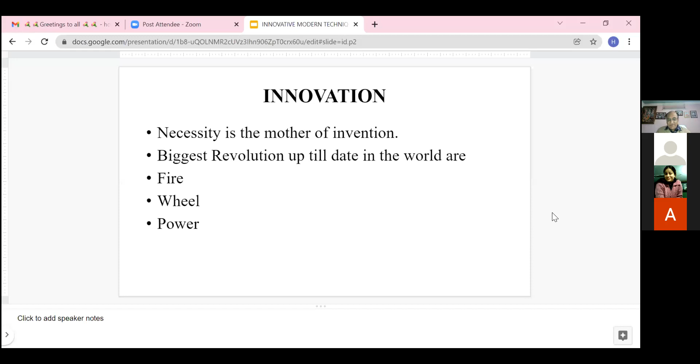Innovation - nothing is permanent in the world, neither products nor technology. Invention refers to the creation of a brand new product or device. Innovation is an act of making change to the existing product or process by introducing new ways or ideas - an act or process or methodology of introducing new ideas, devices, or methods of technology to get better results in terms of quality, size, durability, cost, and time.

The objective of innovations is based on cost saving, time saving, being aesthetically acceptable, and environmental friendly. So the first topic that I have taken is self-healing concrete. Why is self-healing concrete necessary? Because this is one of the major problems of concrete - concrete will crack, whether it is visible or not. But without cracking, reinforcement will not come into action.

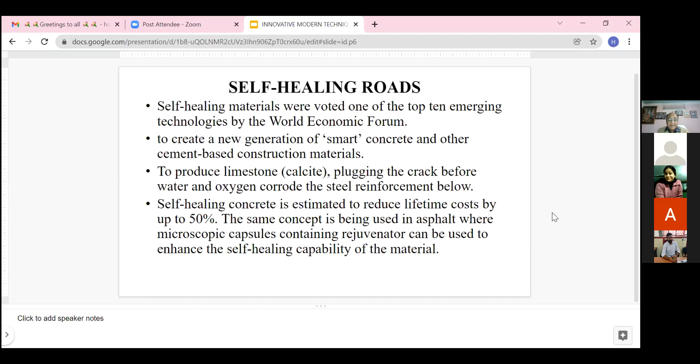Self-healing materials were voted one of the top 10 emerging technologies by the World Economic Forum, to create a new generation of smart concrete or other cement-based construction materials to produce limestone calcite, plugging the cracks before water and oxygen corrode the steel reinforcement below. Self-healing concrete is estimated to reduce lifetime cost by up to 50%. The same concept is being used in asphalt, where microscopic capsules containing rejuvenator can be used to enhance the self-healing capability of a material.

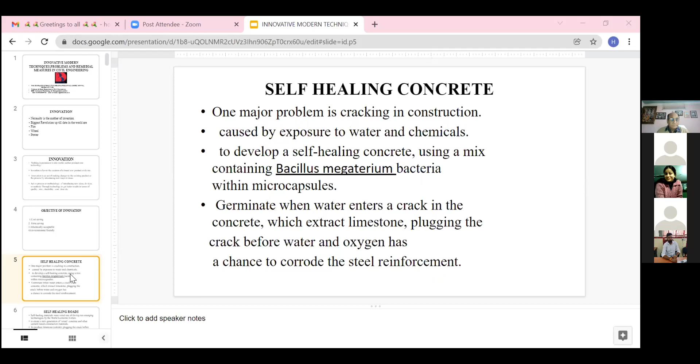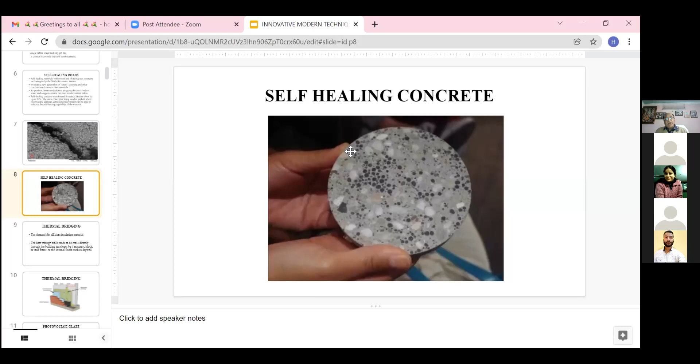The next is thermal bridging, driven by the demand for efficient insulation material. The heat through a wall tends to pass directly through the building envelope, be it masonry, block, or frame, to internal fascia such as dry wall.

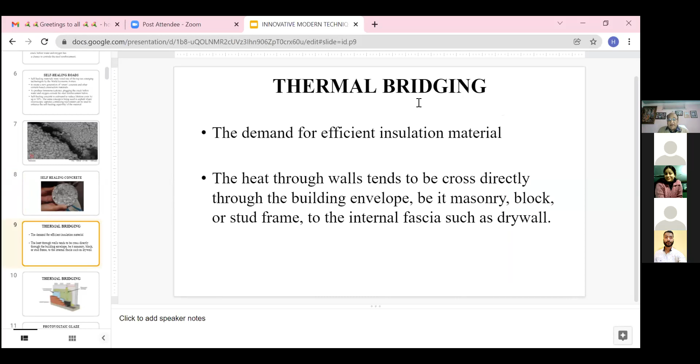We can see here, this is the thermal bridging. This is the insulation layer, a continuous insulation layer. These are the points through which bridging could occur, and this is the wall system. So the transfer of heat from one phase to another is restricted by this thermal bridging.

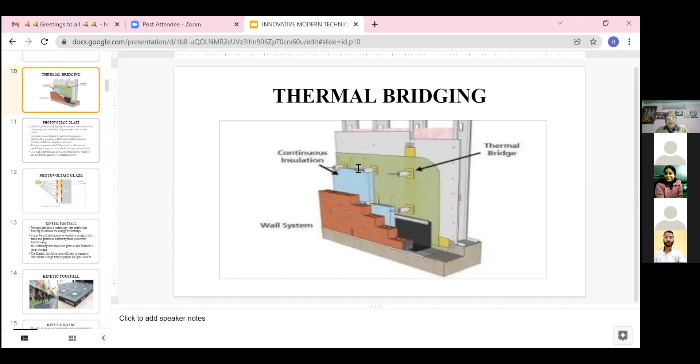Now come to the photovoltaic glaze. This can help buildings generate their own electricity by turning the whole building envelope into a solar panel.

Polysolar is a company that provides transparent photovoltaic glass as a structural building material, forming windows, facades, and roofs. The glazing material of Polysolar is efficient at producing energy even on north-facing or vertical walls. It has high performance at raised temperature, meaning it can be double glazed or insulated directly.

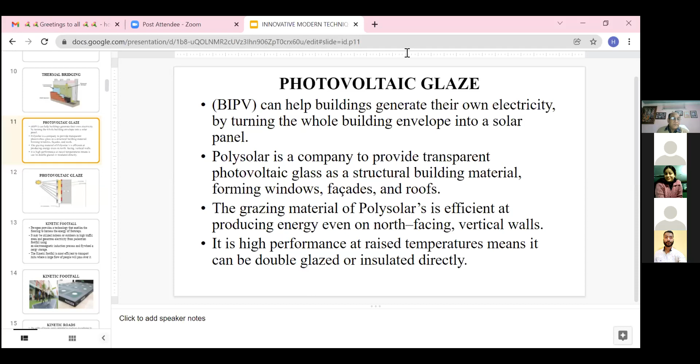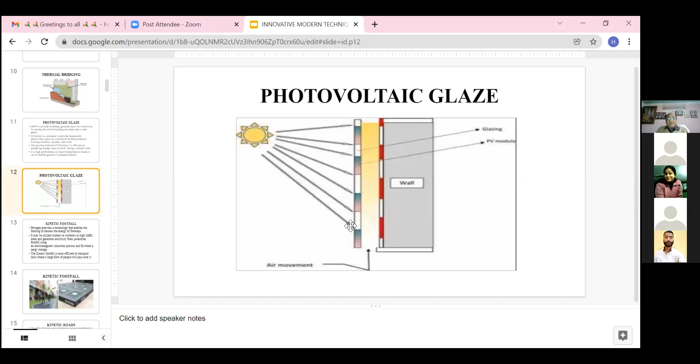We can see here, this is the photovoltaic glaze. This is the glazing layer. The sun rays come directly to this glazing, and this is the PV module, and this is made for air movement. So the solar energy is directly converted into electrical energy.

Then the next innovation is kinetic footfall. Pavegen provides a technology that enables the flooring to harness the energy of footsteps. It may be utilized indoors or outdoors in high traffic areas and generates electricity from pedestrian footfall using an electromagnetic induction process and flywheel energy storage. The kinetic footfall is most efficient in transport hubs where a large flow of people will pass over it.

We can see in this diagram, this is the company Pavegen, and this is the road through which passengers or pedestrians are going. So the kinetic energy of the passenger or pedestrian will directly convert into electricity.

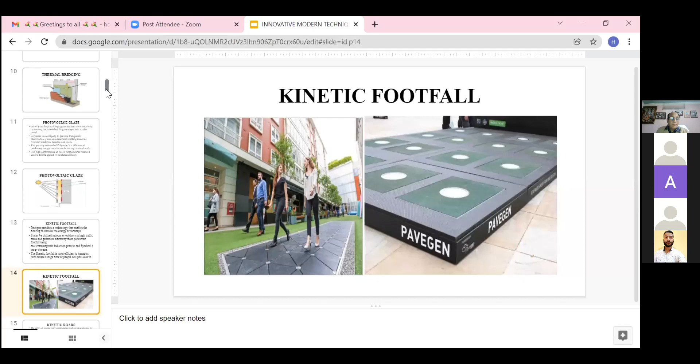The next is kinetic roads. The utility of kinetic energy potential in roadways is being explored by Italian startup Underground Power. The company has developed a technology called Lybra, a tire-like rubber paving that converts the kinetic energy produced by moving vehicles into electrical energy.

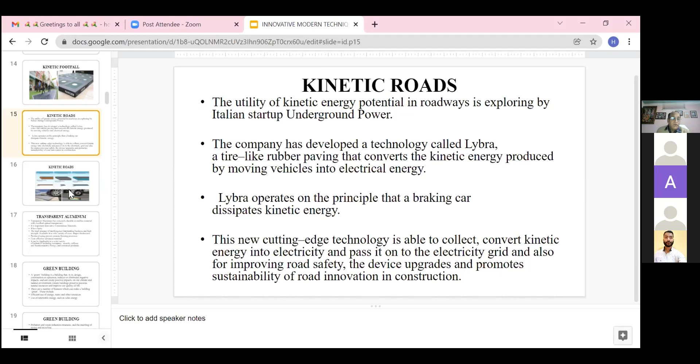Lybra operates on the principle that a braking car dissipates kinetic energy. This cutting-edge technology is able to convert kinetic energy into electrical energy and pass it on to the electricity grid, and also improves road safety. The device upgrades and promotes sustainability of road innovation in construction. So we can see here, this is the kinetic roads.

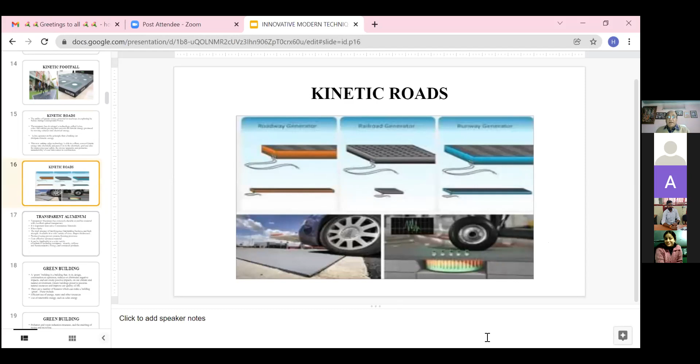Then the next innovation is transparent aluminum. Aluminum is very good looking and pleasant, but one of its major defects is that it is not transparent. So now the innovation is transparent aluminum.

Transparent aluminum has extremely durable crystalline material with excellent optical transparency. It is an important innovative construction material. It has clarity, total absence of birefringence, outstanding hardness, and high strength, available in a wide variety of shapes, sizes, and thicknesses.

Produced using proven ceramic forming processes, it is cost effective, an advanced material. It can be applicable to a wide variety of industries, including aerospace, security, defense, semiconductor, energy, and consumer products. Transparent aluminum is not very popular now, but in future it is going to be a milestone in the field of construction.

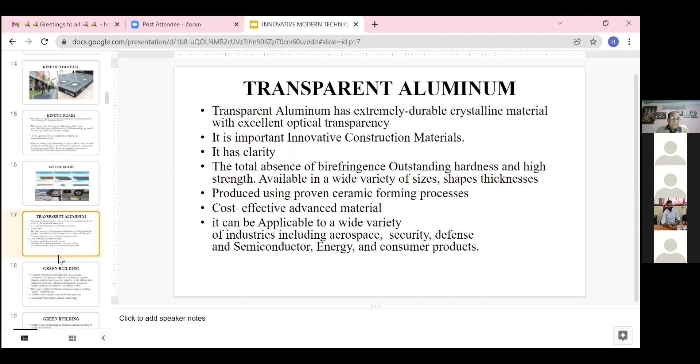Now come to the green building. A green building is a building that, in its design, construction, and operation, reduces or eliminates negative impacts and can create a positive impact on our climate and natural environment. Green building preserves precious natural resources and improves our quality of life.

There are a number of features that can make a building green. This includes efficient use of energy, water, and other resources. Next is use of renewable energy, such as solar energy.

Pollution and waste reduction measures, and the enabling of reuse and recycling. Good indoor environmental air qualities. Use of materials that are non-toxic, ethical, and sustainable. Consideration of environment in design, construction, and operation. Consideration of the quality of life of occupants in design, construction, and operation. A design that enables adaptation to a changing environment.

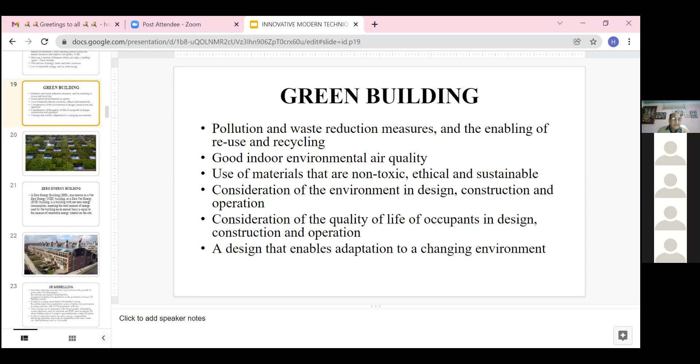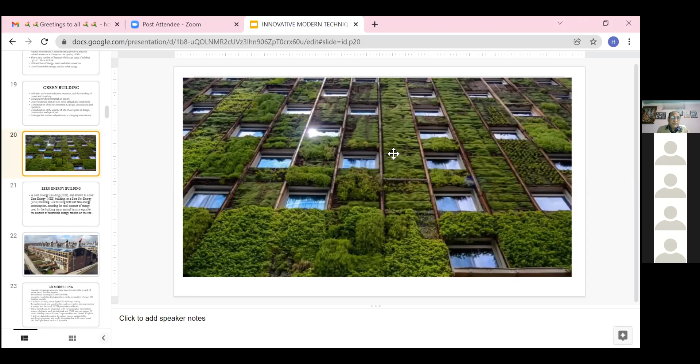Next is zero energy building. It is like a green building, but it has a certain advantage. A zero energy building, also known as a net zero energy building or zero net energy building, is a building with net zero energy consumption, meaning the total amount of energy used by the building on an annual basis is equal to the amount of renewable energy created on the site.

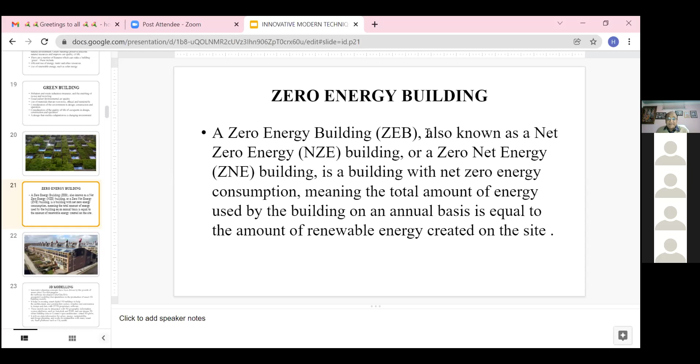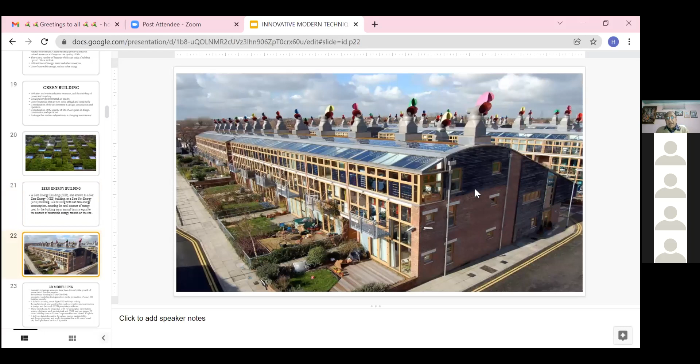Now, though civil engineering is not very much related to computer or IT, nowadays it is very difficult to fix a boundary between the departments of civil engineering, electrical engineering, mechanical engineering, or computer engineering, because all these departments are correlated with each other. So without using computer or artificial intelligence or machine learning, it is very difficult to work in civil engineering also.

So the next is 3D modeling. This is the innovative planning concept that has been driven by the growth of the smart city.

For that purpose, the software developed Cyber City 3D is geospatial modeling that specializes in the production of a smart 3D building model. It helps in creating a smart digital 3D building to help the architectural and construction sector visualize and communicate design and data with CC3D proprietary software. These models can be integrated with 3D geographic information system platforms such as Autodesk or ESRI, and can stream 3D urban building data to Cesium's open architecture virtual 3D globe.

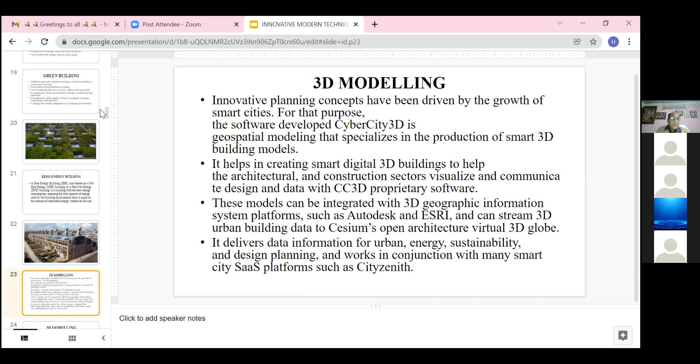Then modular construction. This is a very fast growing innovation. Building construction off-site using the same material and design of the same standard as conventional on-site construction, limiting environmental disruption, delivering components as and when needed, and turning construction into a logistics exercise. A strong sustainability benefit from fewer vehicle movements to less waste.

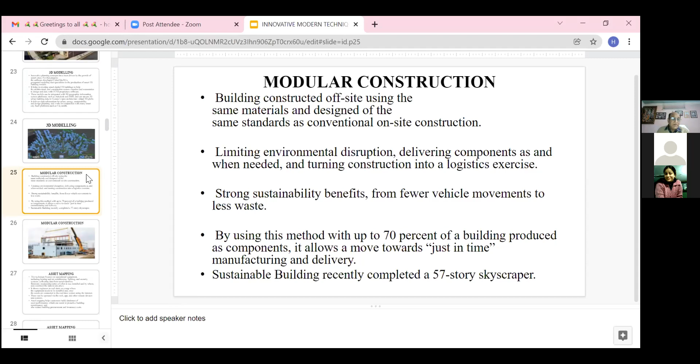By using this method, up to 70% of a building is produced as components, allowing a move towards just-in-time manufacturing and delivery. Sustainable buildings recently completed include a 57-story skyscraper. So the main purpose of this innovation is to manufacture more than 70% of the elements of a building or structure in the factory with complete quality control, and then it is erected at the site. So the quality of this construction is very good as compared to in-situ construction.

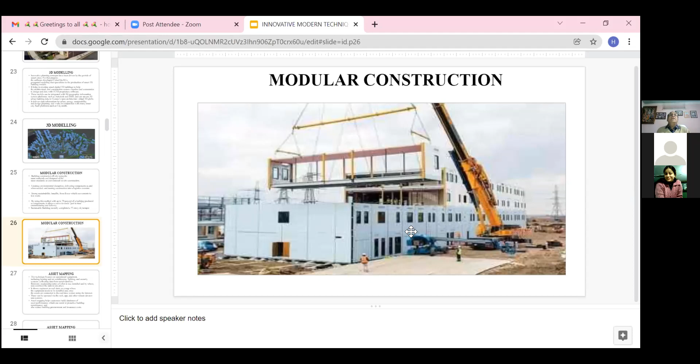So next is asset mapping. This technique focuses on operational equipment, including heating and air conditioning, lighting, and security systems, collecting data from serial numbers, firmware, engineering notes of when it was installed and by whom, and combining the data in one place. The main purpose of this asset mapping is that all the data of the society is kept at a place where it can be used.

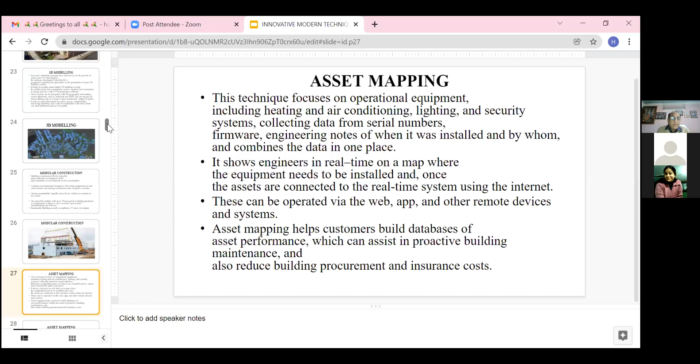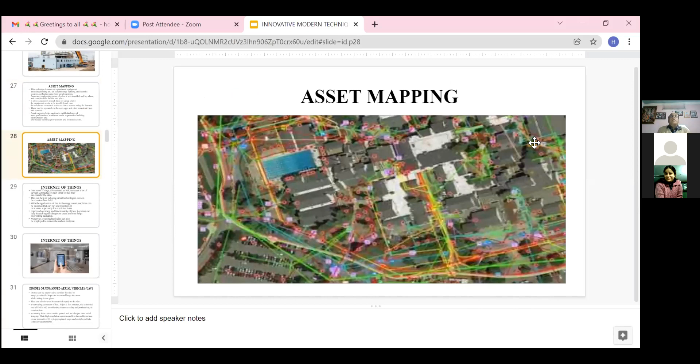Next is Internet of Things, popularly known as IoT, indicating a lot of devices connected to each other so that they can transfer data. This can help in inducing smart technologies even in the construction field. With the application of this technology, smart machines can be invented that can run and maintain themselves, especially for repetitive tasks. Improved accuracy and functionality of geolocation can help in tracking dangerous areas and thus help in avoiding accidents.

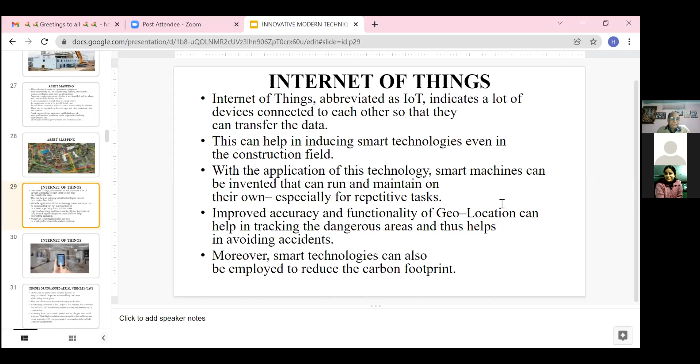Now, the next innovation is a drone, an unmanned aerial vehicle. This is very much used today for various purposes of civil engineering construction. Drones can be employed to monitor the site. Its use permits the inspector to control a large site area while sitting in one place. They can also be used for material supply to the site and surveying vast areas of land in just a few minutes. The continued rise of UAVs will considerably improve safety and productivity in construction.

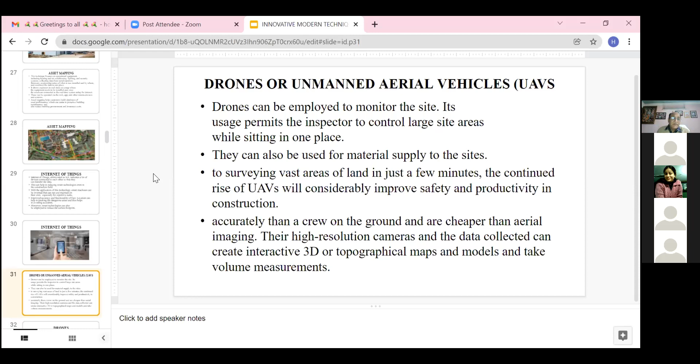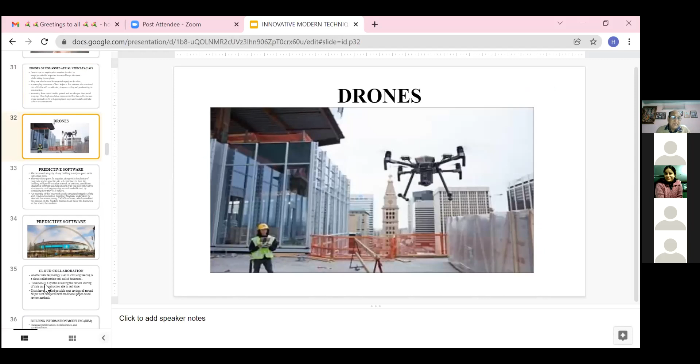The next is cloud collaboration, because it is very much related with computer. Without cloud collaboration, it is very difficult nowadays for the construction industries.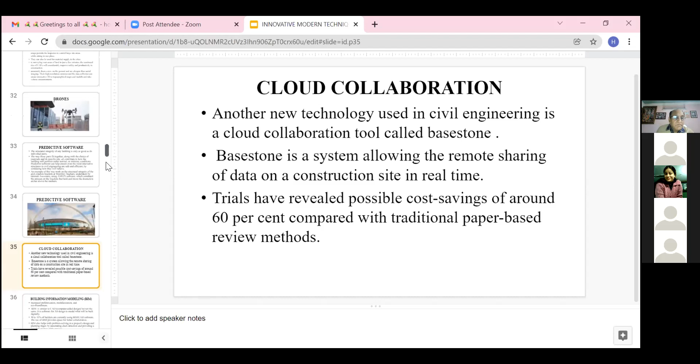Now another important innovation is building information modeling, BIM. It is an increased prefabrication, modularization, and eco-friendliness. BIM is similar to CAD, but it is not a CAD.

It is a software for 3D design to model what will be built digitally. 30 to 35% of the builders are currently using BIM or CAD software. The use of BIM provides a space for better collaboration. BIM also helps with problem solving in the project design and planning stages by automating clash detection and providing a complete picture of a project.

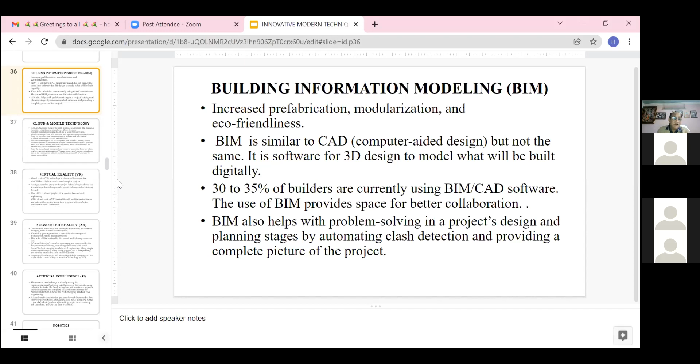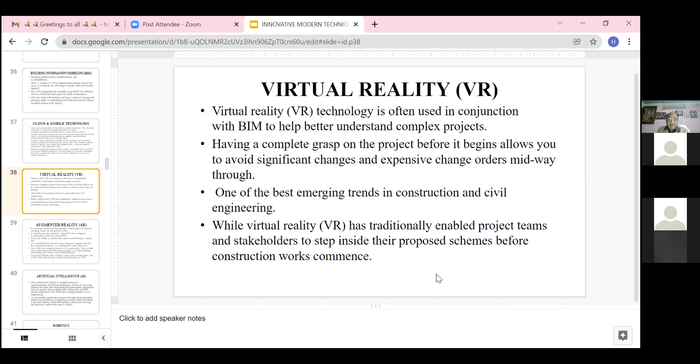Now, virtual reality, VR. Virtual reality technology is often used in conjunction with BIM to help better understand complex projects. Having a complete grasp on the project before it begins allows you to avoid significant changes and expensive change orders midway through. One of the best emerging trends in construction and civil engineering. Virtual reality has traditionally enabled project teams and stakeholders to step inside their proposed scheme before construction work commences.

Now, augmented reality, AR. This is somehow related with virtual reality, but it is slightly advanced than virtual reality. Construction World says that although virtual reality has been an emerging trend over the past few years, it is quickly growing outdated, especially when compared to augmented reality use and benefits. This is the ability to visualize the natural world through a camera lens. So this is the advanced version, you can say, of virtual reality.

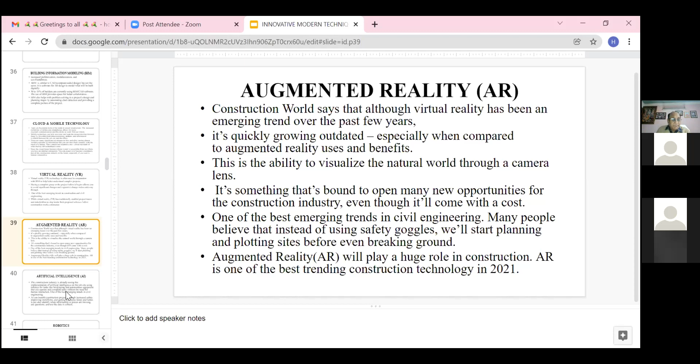Then comes artificial intelligence. Nowadays, the whole world is based on artificial intelligence. Our institute has also opened a department of artificial intelligence, as everyone knows. So without artificial intelligence, it is very difficult now to make up or keep up with others.

The construction industry is already seeing the implementation of artificial intelligence on the job site using robotics for tasks like bricklaying, autonomous equipment that can operate and complete tasks without need for human interaction. One of the best emerging trends in civil engineering. Artificial intelligence can benefit construction projects through increased safety, improving workflow, and getting the job done faster and better. It can also identify when information or pieces are missing.

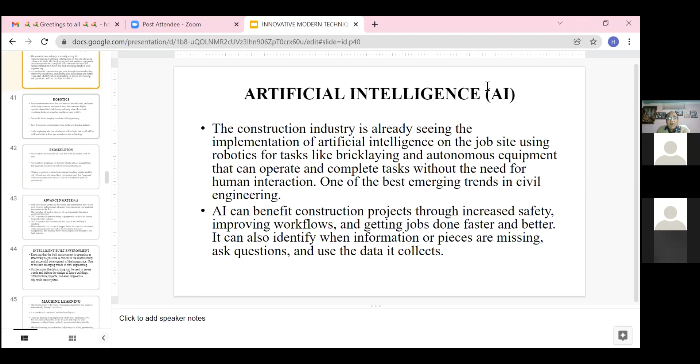Then, exoskeleton. Exoskeletons are wearable devices, meaning they can be worn and work in tandem with the user. The exoskeleton is placed on the user's body and acts as an amplifier that augments, reinforces, or restores human performance, helping to protect workers from manual handling injuries and the risk of hand-arm vibration. These mechanical suits augmenting the human operative can also deliver considerable gain in productivity.

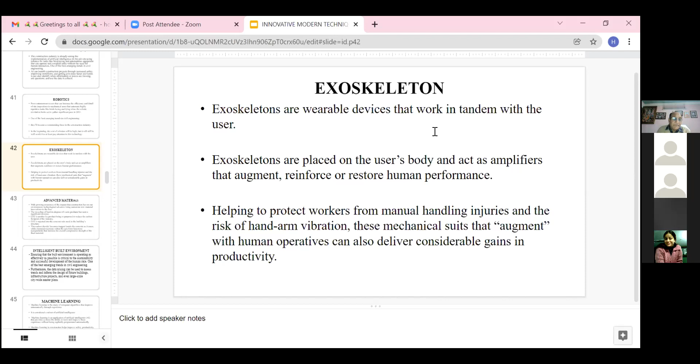Then advanced materials. There are many materials nowadays used to improve the quality, size, shape, etc. With the growing awareness of the impact that construction has on our environment, and technological advances being numerous, new materials innovation comes to the fore. Recycling hard-to-dispose-of waste products has seen a significant increase. CO2 is another byproduct being repurposed to reduce the carbon footprint of the industries.

This is a very innovative thing being done nowadays. CO2 is harmful and contributes to pollution in the environment, but it can be injected into the concrete so that it cures while a chemical reaction within the mix form limestone nanoparticles increases the overall compressive strength of the final material. So carbon dioxide may be used to increase the compressive strength of the concrete.

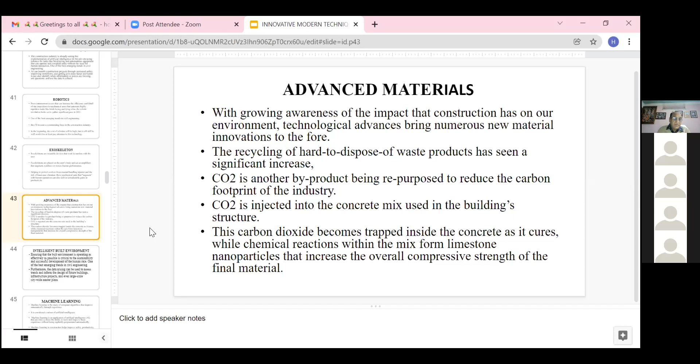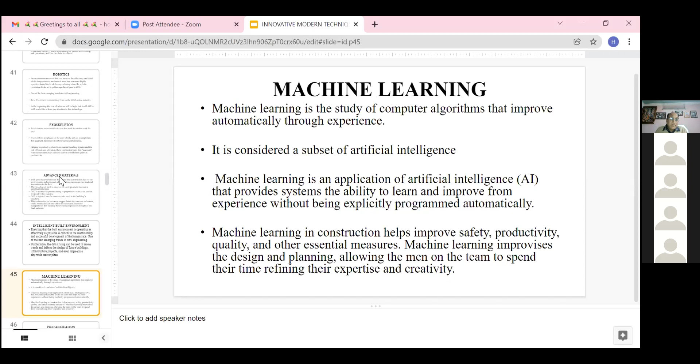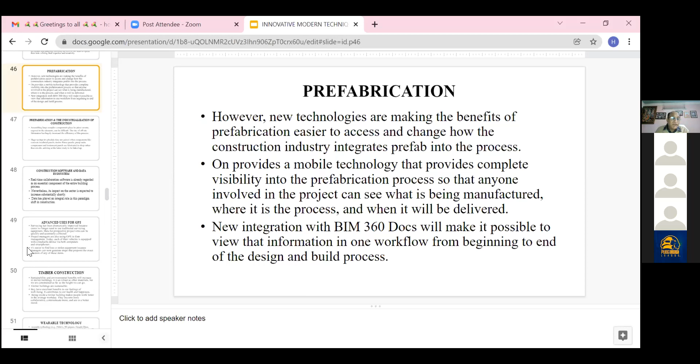Prefabrication and industrialization of construction. Assembling large complex components piece by piece on site, exposed to the elements, can be difficult. The rise of off-site fabrication has hugely increased the efficiency of this process.

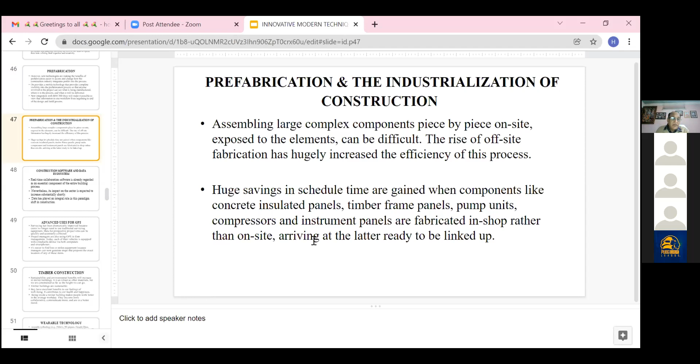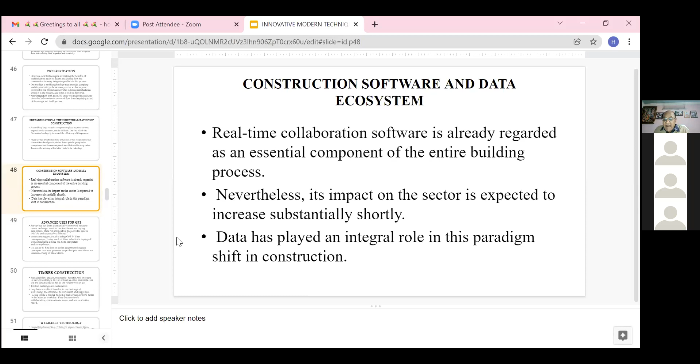Now, construction software and data ecosystem. As I have told, without computer, without artificial intelligence, without other branches of computer, it is very difficult for any department to work and compete with others. Real-time collaboration software is already regarded as an essential component of the entire building process. Nevertheless, its impact on the sector is expected to increase substantially in the near future. Data has played an integral role in the paradigm shift in construction.

The advanced uses for GPS. As you know, global positioning system is now used worldwide, and in the construction industry it is widely used nowadays. Surveying has been dramatically improved because a crew no longer needs to use traditional surveying equipment. Data for a prospective project site can be quickly and accurately collected. Project managers are also using GPS in fleet management. Today each of their vehicles is equipped with a trackable device via both computer and smartphone. It is easier to find lost and stolen equipment because managers can now generate maps that pinpoint the exact location of any of these items.

Now, timber construction. Sustainability and environmental benefits will increase timber building. It is as robust as other materials, but we are constrained as far as the height we can go. Timber buildings are sustainable and have excellent benefits to our feeling of well-being. This is orthodox; it contributes to our health and happiness, a symbol of health and happiness. Being inside a timber building makes people work better in the average workday. They become more collaborative, communicate more, and are in a better mood.

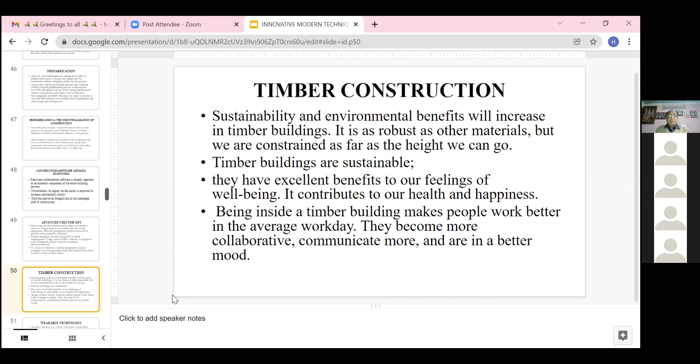Wearable technology, such as Fitbits, 3D glasses, Google Glass, and armbands that can communicate with coaches on the sidelines, will become an emerging trend useful in keeping workers safe. This will help keep workers from constantly looking down at their instructions, because now they can talk to one another via this technology. Additionally, it can help track where workers are if there is an accident. This is bound to become mandatory at some point in the future.

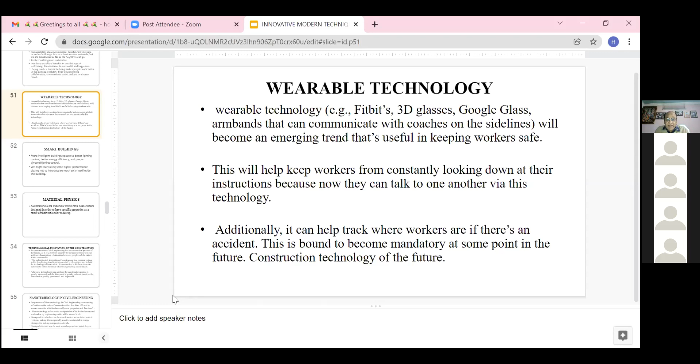Construction technology of the future: a smart building. First of all, this term 'smart' is not just a word. SMART means S for specific, M for measurable, A for affordable, R for realistic, T for timely building. This SMART concept is widely used in a program of the Government of India, the Smart City program. More intelligent buildings equate to better lighting control, better energy efficiency, and proper air conditioning control. We might start using high performance glazing to avoid introducing so much solar load inside the building.

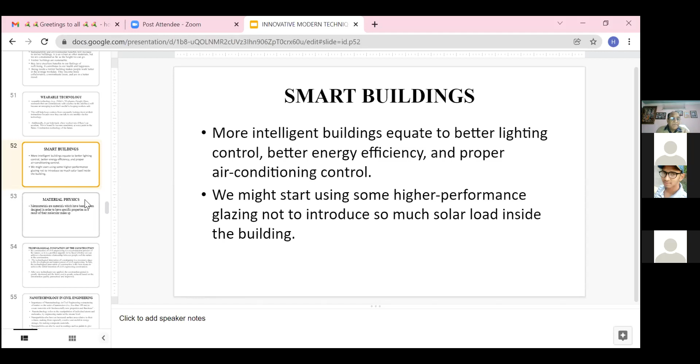Material physics: metamaterials are materials which have been custom designed to have a specific property as a result of their molecular makeup.

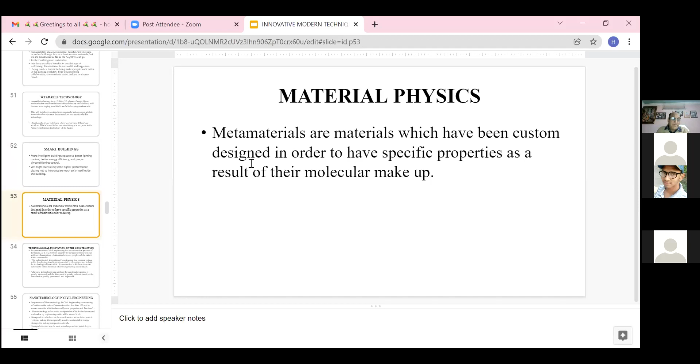Technological innovation of construction. The construction of civil engineering is a reconstruction process of nature, so it is a problem urgently to be faced, whether we can achieve a harmonious relationship between people and nature in construction. This technological innovation of construction is a necessary stage in the development and improvement of civil engineering. In fact, the technological innovation of construction is the best means to achieve the initial intention of civil engineering construction.

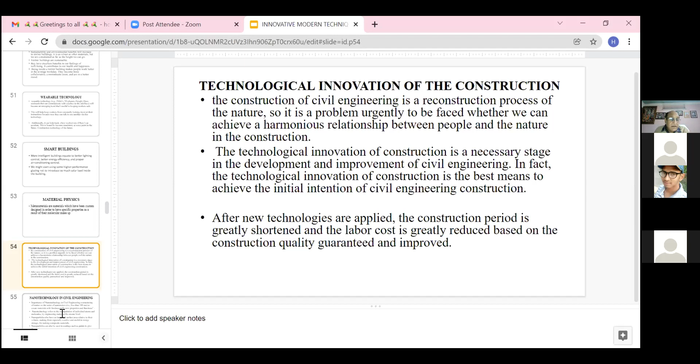So, nanotechnology in civil engineering: though nanotechnology is another branch with a different role in construction, the importance of nanotechnology in civil engineering lies in restructuring matter on the order of nanometers, less than 100 nanometers, to create materials with fundamentally new properties and functions, which can be used as building materials.

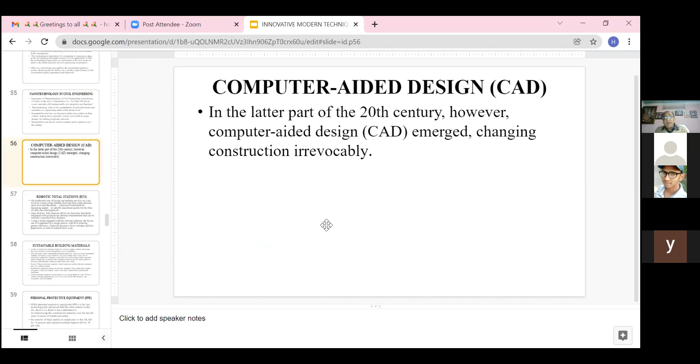Computer aided design, this is widely used software. That is computer aided design.

Now, robotic total station. Total station is equipment by which we can measure angular distance, horizontal and vertical angular distance, and direct distance between 2 points. So it is a total station. This equipment is widely used nowadays.

But the traditional way of laying out building services on site involves a team using a building drawing, a tape measure, a spirit level, and theodolite, a precision instrument for measuring angles, to identify attachment points for lights, cable trays and pipe works. The robotic total station, an electronic theodolite integrated with electronic distance measurement, can be remotely controlled from a distance. So this is the robotic total station.

Now, sustainable building materials. As construction looks for ways to reduce carbon emission, they are turning to more sustainable ways of building. This includes using sustainable building materials such as cross-laminated timber, reclaimed wood, bamboo, recycled rubber, and a long list of innovative materials.

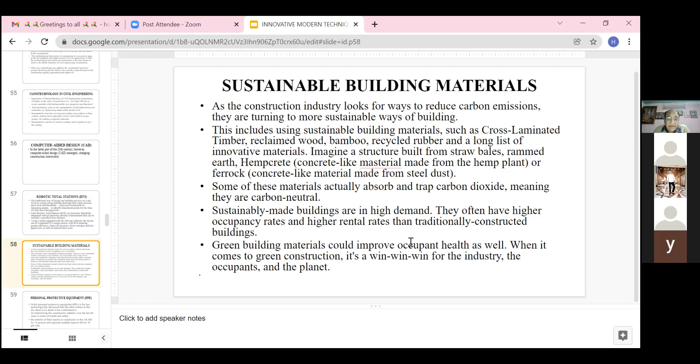Personal protective equipment, PPE. While personal protective equipment, widely used in the Corona period, is far less technologically advanced than other entries in this list, there is no doubt it has contributed to revolutionizing the construction industry over the last 40 years in terms of health and safety. The number of fatal injuries to employees in the UK fell by 73%, and reported non-fatal injuries fell by 70%.

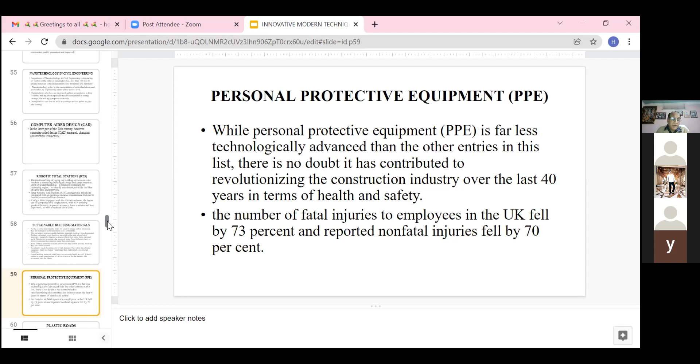So how is it important? In the Corona period, it is widely used by everyone. Now come to the road sector.

First of all, plastic road. Concrete production contributes 8% of global carbon dioxide emissions, according to WWF. It is made from quarried aggregate such as limestone, granite, or sand, bound with cement, bitumen, asphalt and other agents. But what if we replace these finite resources with one of humanity's infamous byproducts, such as plastic?

India has been filling potholes using plastic as a binder on a small scale for years. UK engineers, Toby McCartney, have even developed a way to turn recycled plastic into pellets that can be added to the asphalt to decrease the use of a binder.

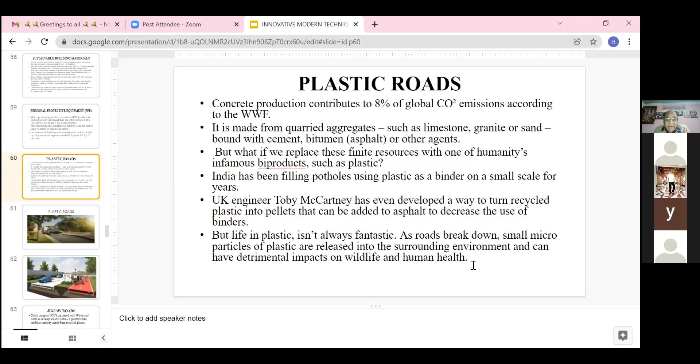But life in plastic isn't always fantastic. As roads break down, small microparticles of plastic are released into the surrounding environment and can have a detrimental impact on wildlife and human health. So this is the plastic road. This picture shows a plastic road being constructed by a paver finisher. This is the paver finisher.

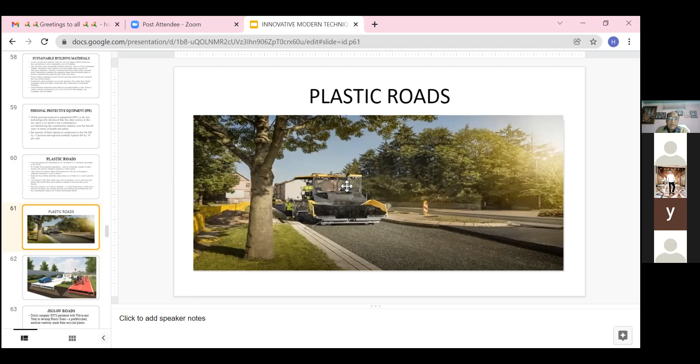Dutch company KWS partnered with Wavin and Total to develop Plastic Road, a prefabricated, modular roadway made from recycled plastic. The modular fitted pieces make it 70% faster to build, while the plastic hollow design makes it 4 times lighter than asphalt.

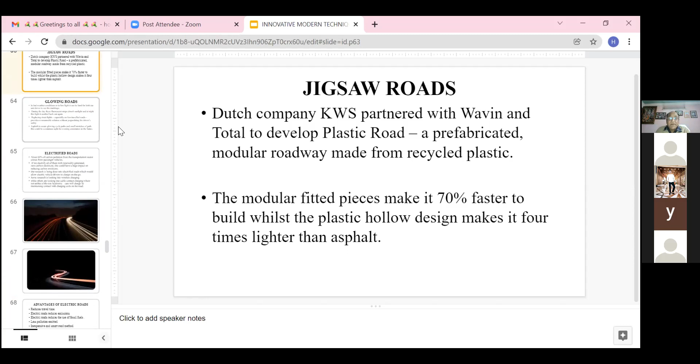Now, the next is glowing roads. In bad weather conditions or low light, it can be hard for both car and driver to see the markings. During the day, these fluorescent strips absorb sunlight, and at night this light is emitted back, replacing street lights, especially on less traveled roads, providing a sustainable solution without jeopardizing the driver's safety. Asphalt is used to create a glowing cycle path on some stretches. This could be a common sight for evening commuters in the future.

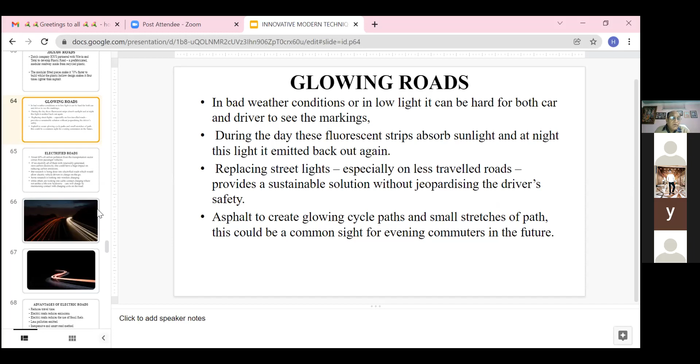So the next is electrified roads. There are 2 or 3 types of electrified road works. About 60% of carbon pollution from the transportation sector comes from passenger vehicles. If we electrify all of them with renewably generated zero carbon electricity, this could have a huge impact on reducing carbon emissions.

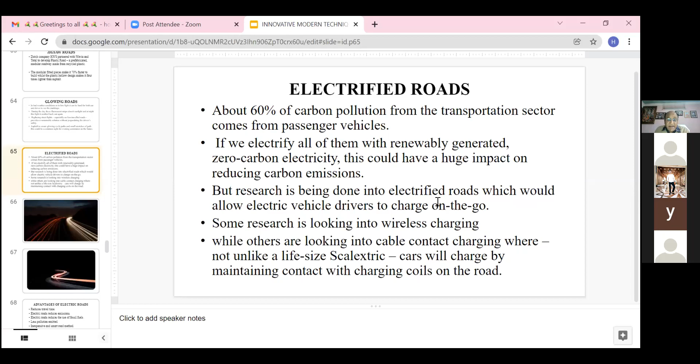This is very important. In Lucknow, Shaheed Path, there was no light on the Shaheed Path. Finally, the High Court had to intervene because construction agencies like NHAI, LDA, and PWD all refused to maintain the Shaheed Path. So the High Court directed LDA to electrify the roads, meaning not exactly electrified, but that light should be provided on the Shaheed Path. This is a very important factor for urban roads.

Advantages of electric roads: they reduce travel time, reduce emissions, reduce use of fossil fuel, cause less pollution to be emitted, are inexpensive, and are a smart road method.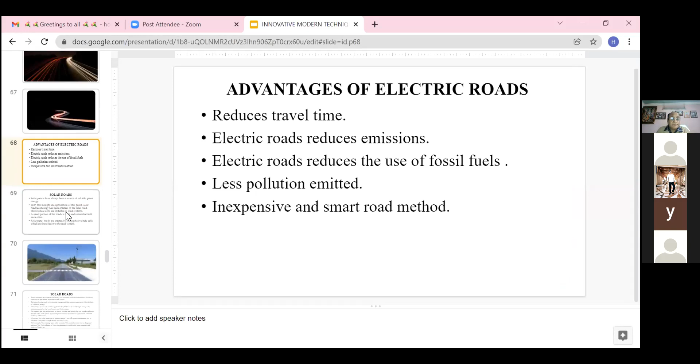Now the next thing is solar roads. Sun is the primary source of energy, and it could be used for other purposes also. Solar panels have always been the source of reliable green energy. With this thought and application of this panel, solar road technology has been created. In the solar road, photovoltaic cells are installed in the road system. A small portion of road is built and connected with each other. The solar panel roads are created by using photovoltaic cells which are installed into the road system.

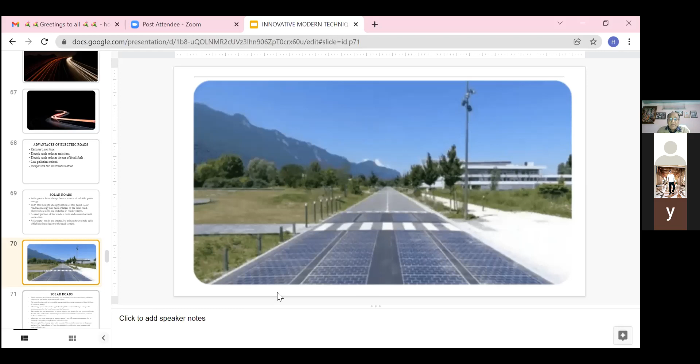These are innovative and revolutionary replacements of infrastructure, construction of petroleum byproducts and asphalt. The idea of solar roads is to store energy, which can then be converted into electrical energy. The energy produced could be applied to light the road and bridge along with generating power for local homes and businesses.

The council put this project on trial for 6 months, and the result after 6 months indicates that the solar road system improved performance in context of operational cost and usability of the road. Moreover, the solar path was able to produce about 3000 kilowatt hour of electrical energy, which is adequate to brighten a single house for at least a year.

The concept of developing solar paths on the side of the road has become very widespread, and now the United States of America is planning to install solar panels on all their roads and highways. Because this is a green energy source, it is going to be used widely all over the world.

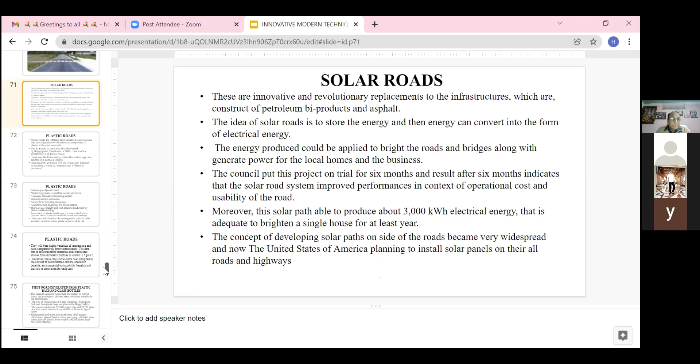Again, plastic roads. Plastic roads are different from standard roads because they are made entirely of plastic and composite of plastic with other material. Plastic road in India was developed by Rajagopalan Vasudevan in 2001, consisting of an asphalt mix with plastic waste. India was the first country globally where this technology was adopted, in Chennai. India recently constructed a 703-kilometer national highway using plastic waste as the wearing coat of the flexible pavement.

In Lucknow, there are many roads which are constructed using this plastic road technology. Plastic roads are made with two methods. One is coating the aggregate with plastic, so the aggregate becomes impervious. The other is using plastic to modify the bitumen so that the quality of bitumen is improved, meaning the modulus of elasticity of the bitumen is improved, so the life of the bitumen is increased considerably.

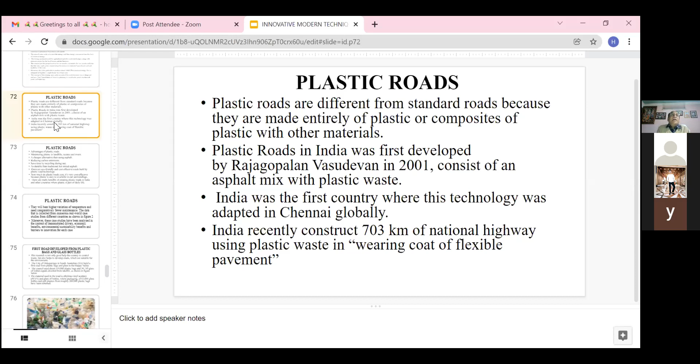Advantages of plastic roads: they minimize plastic in landfill, ocean, and river. They are a cheaper alternative than using asphalt, reduce carbon emission, and save time by recycling during use. They are more durable than traditional hot mix asphalt. They are eco-friendly and cost-effective roads built by plastic road technology.

How much do plastic roads cost? It is very cost effective because plastic is easy to acquire in our surroundings. There are multiple benefits of creating plastic roads in India and other countries where plastic is a part of daily life.

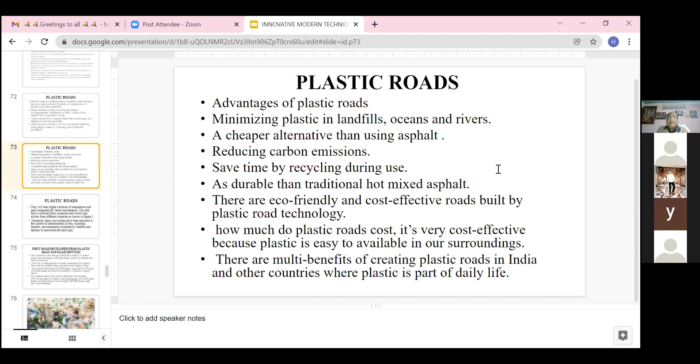So there will be higher variation of temperature tolerance and the roads need comparatively fewer maintenance. Data collected from numerous real world case studies from different countries is shown. Moreover, these case studies have been analyzed in the context of demonstrated driver, economic benefit, environmental and sustainability benefit, and barriers to innovation for each case.

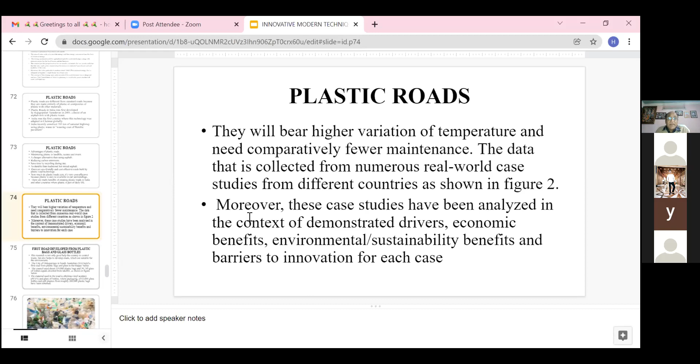The first road developed from plastic bags and glass bottles is a very useful, innovative idea. Plastic is used to construct a plastic road, and this is also very important. The research not only helps the country control waste, but also helps develop roads suitable for the environment.

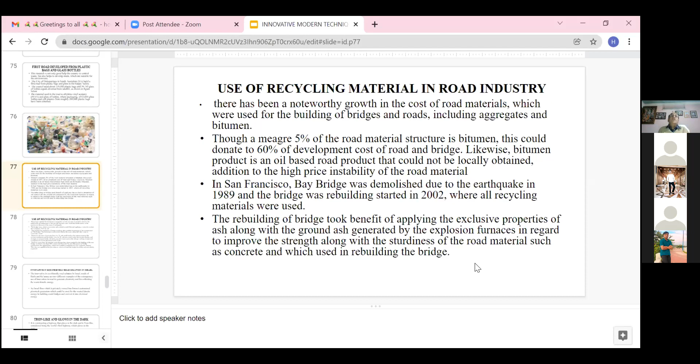So recycling is nowadays very prominent because the quality of material used from a demolished building is as good as new material, so why not use it? Nowadays it is a very good trend to reuse materials from demolished buildings or structures.

The use of particles from fly ash could lead to enhancement in the mixture's usefulness and durability. Also, fly ash could make the mixture thicker and stronger compared to old-style concrete, making it better equipped to carry substantial traffic loads. More than 30 concrete mix designs have been applied for building the new bridge, in which more than 50% of mixes were from fly ash. The bridge construction also applied slag, crushed and granulated from the blast furnace. This slag was applied in pier columns, and as a result the bridge's durability and workability improved.

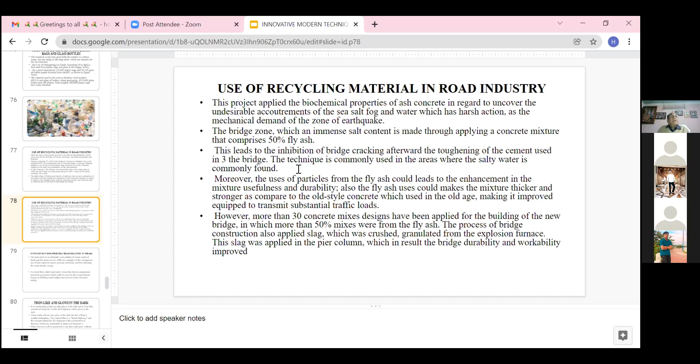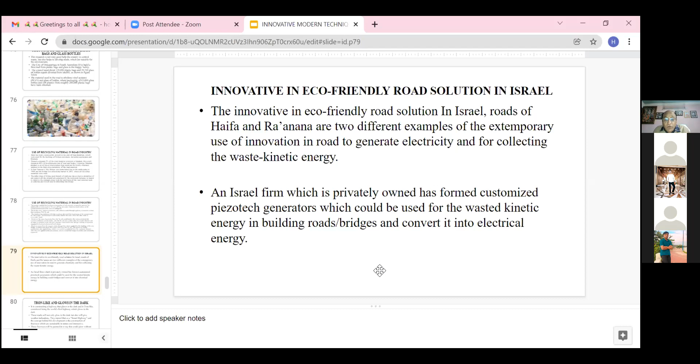Innovative eco-friendly road solutions in Israel: the roads of Haifa and Ra'anana are two different examples of contemporary use of innovation in roads to generate electricity and collect waste kinetic energy. Different types of technology are used in Israel. A privately owned Israeli firm has formed customized piezotech generators which could be used to convert waste kinetic energy in buildings, roads and bridges into electrical energy.